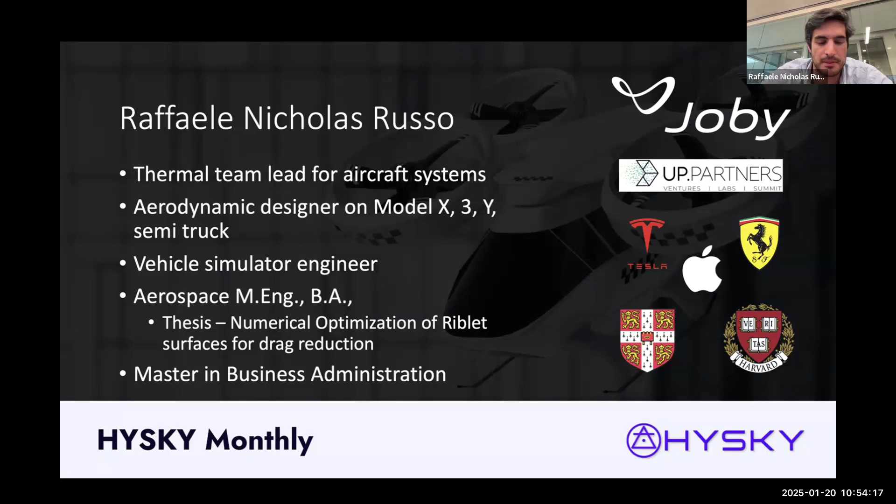The other thing that's valuable of this slide is the fact that I spent a while in electric. So it's not like I showed up in the workforce as a firm believer of hydrogen from the beginning, thinking electric sucks, this is the only answer. Rather I spent significant time at Ferrari, the Ferrari F1 cars, on the team I was in - believe it or not, they're hybrid, they have a battery and they use that for boost. So from Ferrari F1 to Tesla, and then Joby. Initially, Joby was electric only, right? Joby is still electric only, but the team was focused exclusively on the electric product. So I've had plenty of time to appreciate the huge value that electric cars, electric aircraft bring and will bring to society. And that's, I think, a better platform than coming in blind to electric and going straight to believing aviation must be hydrogen only.

Okay, enough about me. Why hydrogen? Of course, you've seen, this is HYSKY. Many of you come from the space of either hydrogen or aviation. I'm sure you've seen a slide titled Why Hydrogen a million times. I will try and make this specific and tailored to what Joby believes, what I believe, what someone who's done the work believes. So in some sense, I don't just say this, I actually see it, having done a bunch of research and development in the space. But it really started in the public eye only last year.

Now, why hydrogen means a bunch of things. Let's start with the biggest one, which is, of course, its fuel efficiency, its weight efficiency. You've seen forms of these slides in the past. I think what's valuable about this is comparing and combining the value of hydrogen compared to battery and compared to jet fuel, not just on the specific energy basis, but also the efficiency basis.

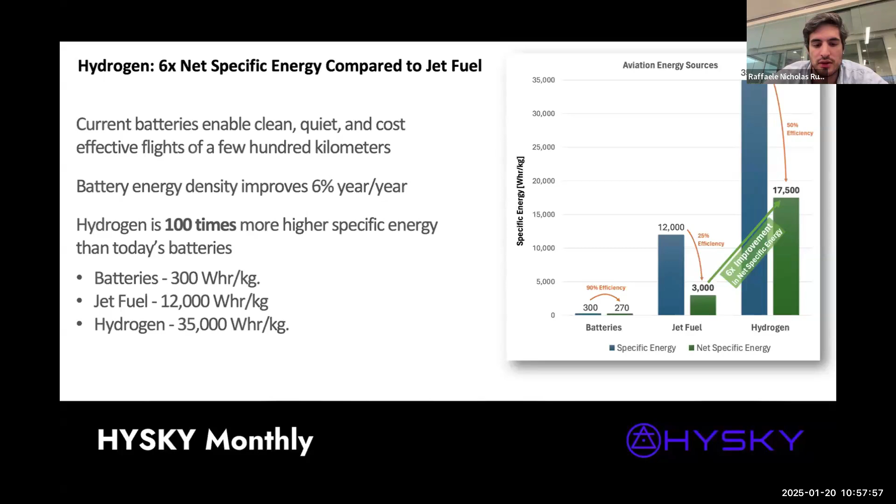To put this in numbers that are more palatable, more directly applicable to something you may be more familiar with that isn't Joby, here's a comparison of the A350 and the A320neo. Roughly, most of its configurations are twice the range and twice the payload of a 320 versus a 350.

The consequence of doubling the range and the payload from one aircraft to the other is actually a 4x increase in weight, roughly a 4x increase in upfront capital cost, and then that mission burns 6x more fuel. If you normalize that per passenger, which we like to work in per passenger per mile, that means it's still 2x heavier, 2x the capital cost, and 3x the fuel.

What's very valuable here is the fact that, as we said for batteries, you have a lot more batteries as you fly further. That's also a true statement for fuel. It's less appreciable, it's something we accept as the status quo today, but hydrogen looks to improve this further than what jet fuel can, basically getting to a point where the vast majority of the aircraft isn't carrying everything else, it's carrying people.

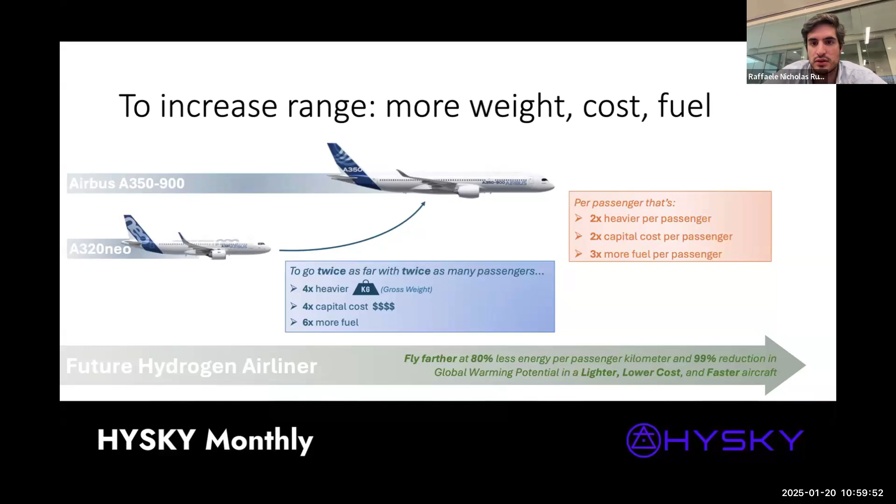At the bottom, we have a future hydrogen airliner, or a generic one. You can fly further, but only have 80%, or decrease 5x, or have 80% less energy per passenger per kilometer. The other tremendous part, which I'll get to in the next slide, is the fact that we believe the reduction in global warming potential is up to 99% compared to a typical jet fuel powered aircraft.

You've seen this slide a million times. I will say, Joby believes this, JoeBen believes this, this is front and center. What we're saying here is that many countries in the world have committed to net zero by 2050. Aviation today is only 2%.

You can argue a lot of things that today contribute a lot more. Wildfires are a much bigger proportion. Maritime transportation is a much bigger proportion. The electricity grid is a high proportion of all those. However, it's one of the hardest to abate sectors. So we don't have clean answers today on how to get that total number, meaning CO2 emissions in tons per year, not percentage, lower.

A lot of numbers, a lot of studies I've read through and researched, all suggested that 2% of aviation today is likely to increase to 10%. Partly because everything else is going to drop as they try and push to net zero, and partly because luckily larger shares of society are going to have access to travel, and therefore the actual total number of tons per year of CO2 is going to go up.

But if we can forecast pretty reliably that in 2050, while everything else is going to net zero, aviation is going to higher and higher percentage of the total, we appreciate we need to start moving now. That's part of the reason, alongside the efficiency argument I just made, as to why it's now—it's 2025, it's 25 years, it's not that far.

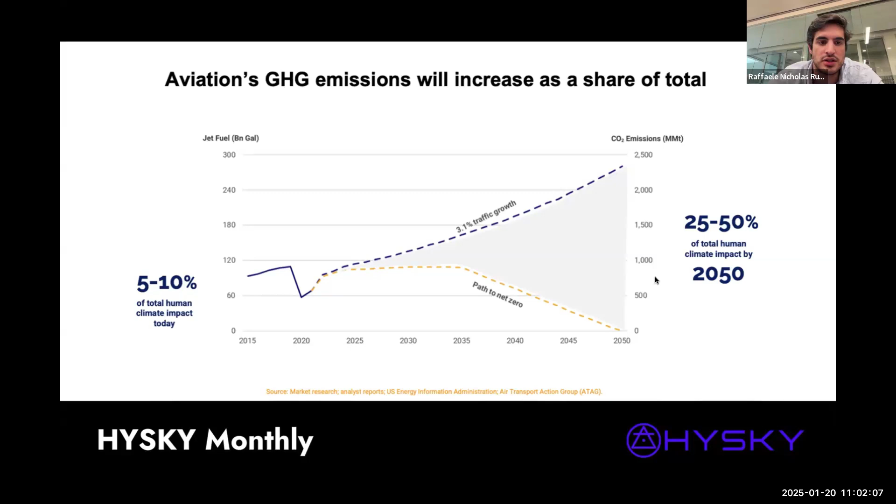An additional point on emissions is the contrails part. This is something that has a lot of research backing it, but there's also research against it. Luckily, a few companies and a few research centers are trying to answer this question in more detail.

Contrails are the clouds that form behind aircraft. Depending on conditions, altitude, and humidity, they have a tendency to either dissolve immediately or remain and form clouds that ultimately have the same effect as CO2. In the sustainability world, it's typical to talk about CO2 equivalent.

What that means is not just the CO2 you're putting out, but actually what's causing global warming. Contrails do not have CO2. They have NOx, soot, water vapor, particles of all sorts, but not CO2, and yet they contribute to CO2-like effects, which is why if you only account for CO2, you capture just a third of aviation's total climate impact.

All the studies converge differently - some show 30%, some show 70%, somewhere between 1.5x to 3x - but most of the research agrees that for the CO2 emissions you see, about double, so 2x, for a total of two-thirds, is what you don't see - what contrails are contributing just by forming.

I'll leave this here because it's not itself something that - how does it tie in? How does it change with hydrogen? What matters is that you need to solve not just the CO2 emissions themselves, you need to solve this contrails emission equally or more importantly.

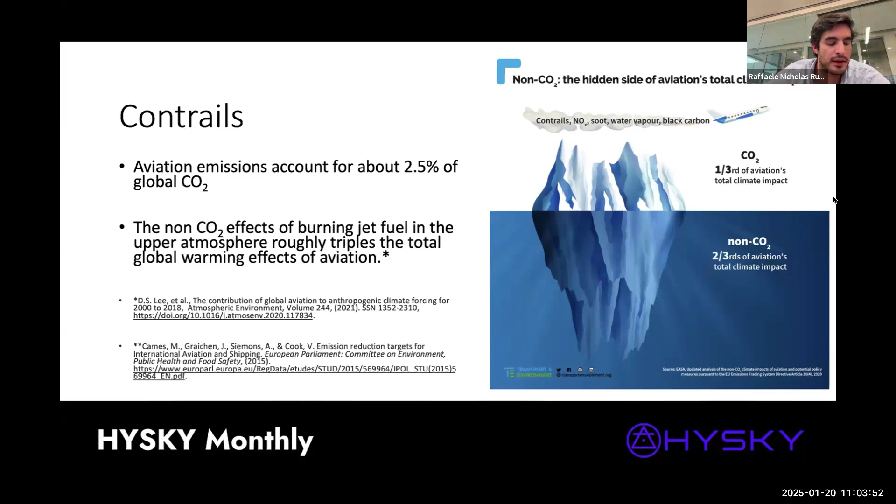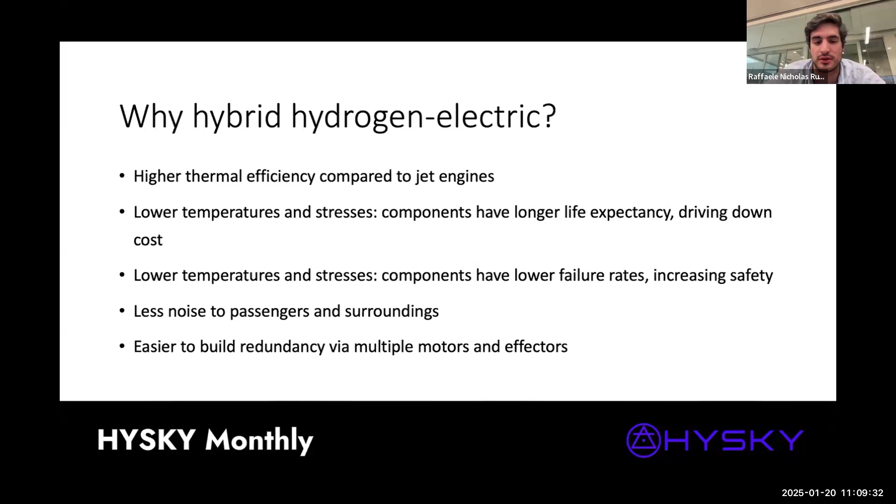There's also significant benefit, and I'll show you more in later slides about why this is true, but it's easier to build redundancy with multiple motors and effectors. Electric motors are easier to scale down in size compared to combustion, so it's not much more work to have six smaller props than one large prop, as long as you're flying electric. If instead you're flying with a combustion engine, you either have very complex axles and transmissions, or you leave a lot on the table in terms of weight, because you're creating six or multiple separate combustion motors and effectors.

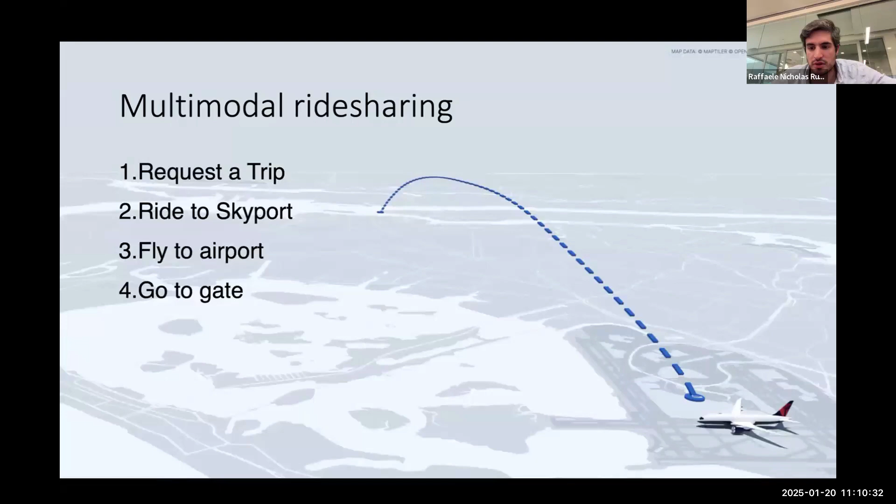First and foremost, what does Joby do? What is Joby going to launch as its first product? You're in Manhattan, you're trying to get to the airport, you call an Uber, and that Uber takes you to the closest vertiport. Here, an eVTOL, like the one shown, takes you to the airport and you're already at a gate. Now, this example is with an airport, and it's showing our partner Uber and our partner Delta. What really matters here is the fact that today, and I've done it many times, JFK to Manhattan is either an hour and a half by subway, or probably even more during rush hour, and $100+ in a taxi.

The multimodal element of this will come back later with hydrogen, but the key thing is Joby has already started, by acquiring Uber Elevate a few years ago, implementing multimodal ride sharing. All that means is we're looking at door to door travel. We're looking at how, from where you start to where you want to be, we're minimizing that time. So you need various different things: you need a car, you need a VTOL, you need a commercial aircraft. All those options are integrated into what will be our product launching in Dubai first, and in US markets right after. This is significantly different from the model today of aviation travel, or really most types of travel, where this multimodal element doesn't exist.

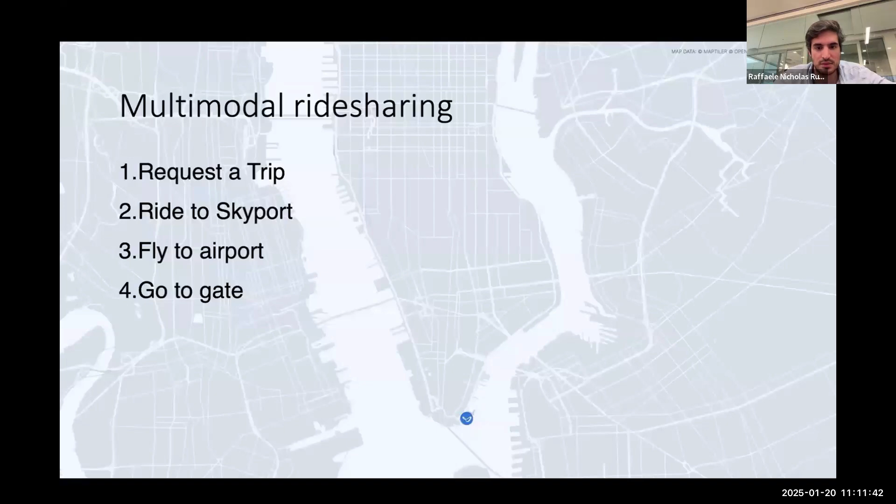Once you're in the air, the aircraft transitions to flying on the wing. Flying on the wing, compared to remaining in the mode most drones fly in, is why you can get to these longer ranges. Flying on the wing is significantly more efficient in terms of lift to drag, in terms of distance traveled per unit of energy, than flying purely as a prop. Other competitors are flying purely as a multi-rotor or quadcopter, different names for it, but if you remain in this vertical flight type of asset, you dramatically reduce your range. If you manage to transition to forward flight like Joby does, then you're getting into the hundreds of miles of range. You're not going to exceed this because, spoiler alert, electric is a lot less energy dense than it needs to be to go 500 plus miles.

But to get to the distances of large urban centers like New York, like LA, 100 miles is actually your perfect sweet spot. In terms of speed, ultimately the goal is to save hours and minutes of travel, so it is significantly faster than ground travel. Additionally, and this is an interesting number, the average ground trip is about 40% more circuitous, a longer route, than flying in a straight line, as the eagle flies, or whatever the expression is.

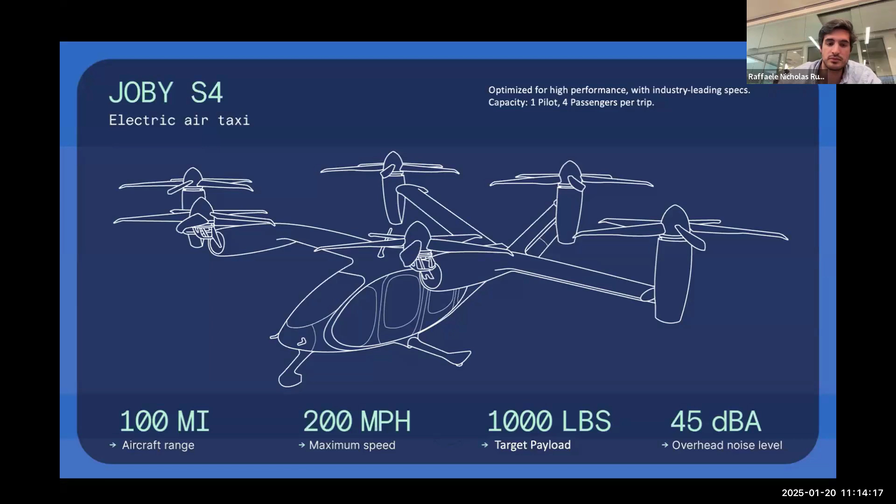It invited NASA on site to do a bunch of studies on the noise profile of a bunch of aircraft. We have our own Cirrus SR-22. We got a few other aircraft and helis on board, and then we got Joby. As I mentioned earlier, having forward flight and having multiple props actually decreases the noise by increasing efficiency, decreasing tip speed.

45 decibels is actually really, really quiet. You may find on YouTube various videos of JoeBen talking while the aircraft takes off behind him, and there's no weird sound production happening there, no targeted microphones. The aircraft is significantly quieter than anything with comparable capabilities can do today.

This element of safety, of sound, is something that Joby, well before I joined, identified as one of the most important elements for the successful outcome of this product, meaning people actually wanting them. If this is too loud - a good example is if you've ever been to Rio, or even South Manhattan, there's a lot of helicopters, a lot of noise. The average population, the vast majority of the population doesn't fly in helicopters, so it just comes as a nuisance.

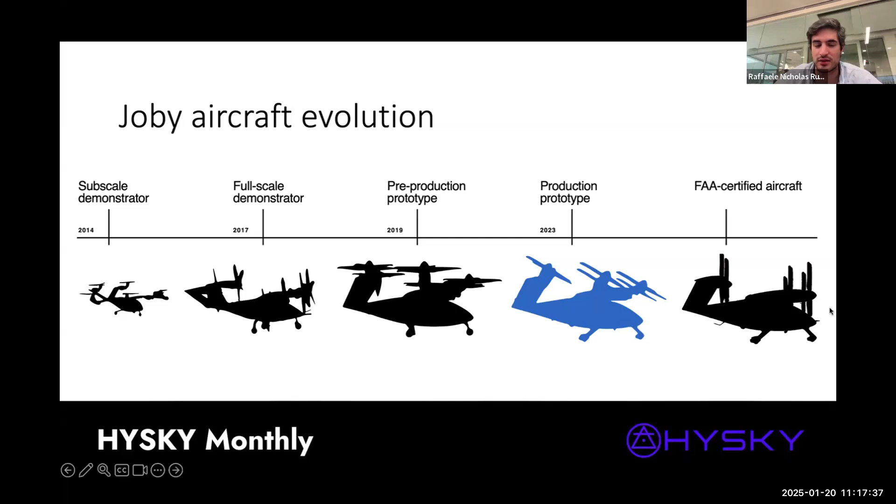It was actually a spin-off. It's founded in 2015, but H2Fly already existed in the form of a DLR project with the same people that eventually founded the company, well before 2015, and had already demonstrated gaseous hydrogen flights before Joby acquired it in 2021 - right around where I started working myself on hydrogen.

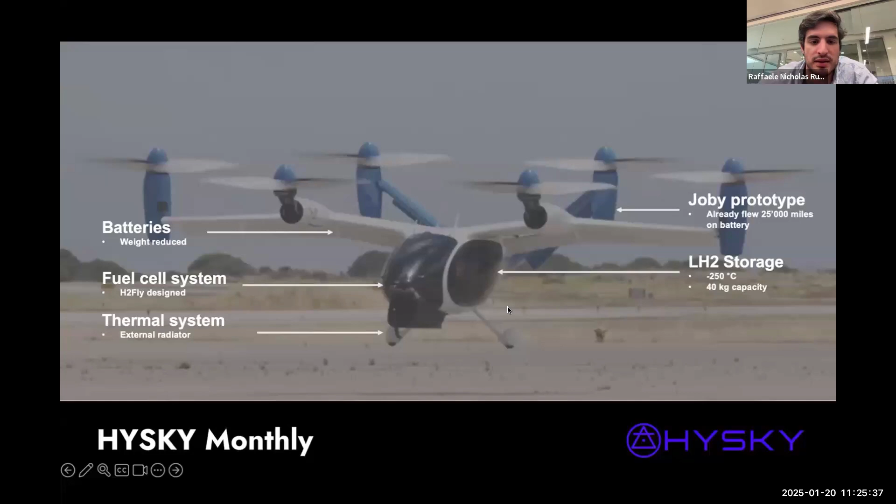As I mentioned, H2Fly was our close collaborator for the fuel cell. And the scoop under here is for external cooling. Batteries don't require that much cooling because they're 90% efficient, as mentioned earlier. Fuel cells have better efficiency than jet engines, at 50%, but that means for every kilowatt of electrical power you produce, you have about a kilowatt of heat to get rid of. So we designed and retrofit this carbon fiber scoop that contains a radiator, rejecting that heat using ram air.

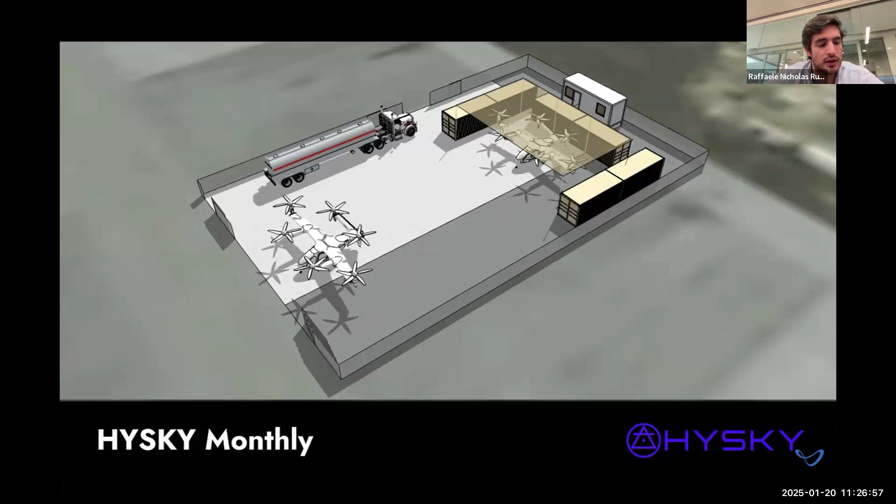We needed to design the aircraft, retrofit as much as possible, reuse as much of the existing electric resources as we could, get permitted and approved for this facility, and we were able to achieve a 5+ hour flight. This is a rendering, but the aircraft did fly in this actual pattern.

This is Marina, California, just north of Monterey — somewhere in the middle of California for those who don't know it. It's a beautiful place for Joby to be testing all of its aircraft, and specifically this one would run circles of a few mile radius for hours and hours. It got boring after a while for the pilots and the team just watching it spin circles, doing various flights at 500+ miles, the longest of which was 561 miles, for 5 hours plus.

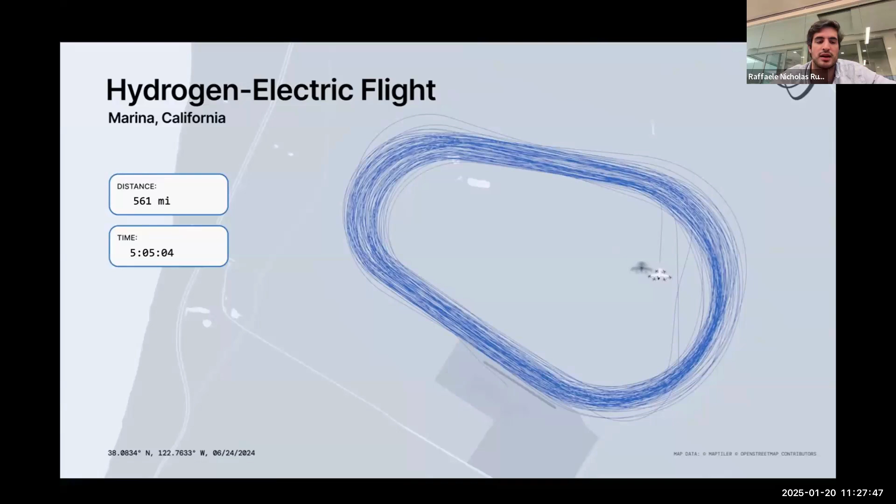The first thing is, as I've repeated many times at this point, fuel cells are the key enabler because they make the best part of hydrogen and electric. Not just because Joby's already got a great electric product, but because the physics are significantly better, and the environmental side of it is significantly more competitive. Fuel cell development for all applications — maritime, ground, energy storage, and aviation — is progressing really quickly. Every week I speak to new suppliers coming out with tremendously valuable products.

There's definitely an inflection point in fuel cell supply, whether it's H2FLY's own or external suppliers. There's a lot of development happening that will make fuel cell based aviation easier and easier.

Number two, for aviation, that's not necessarily the answer for other modes of transport, but for aviation, liquid hydrogen is key. It does come with a penalty, especially the penalty of boil off, the managing of it, the design, penalty in safety if not well managed, and additionally a penalty in the cost of liquefaction.

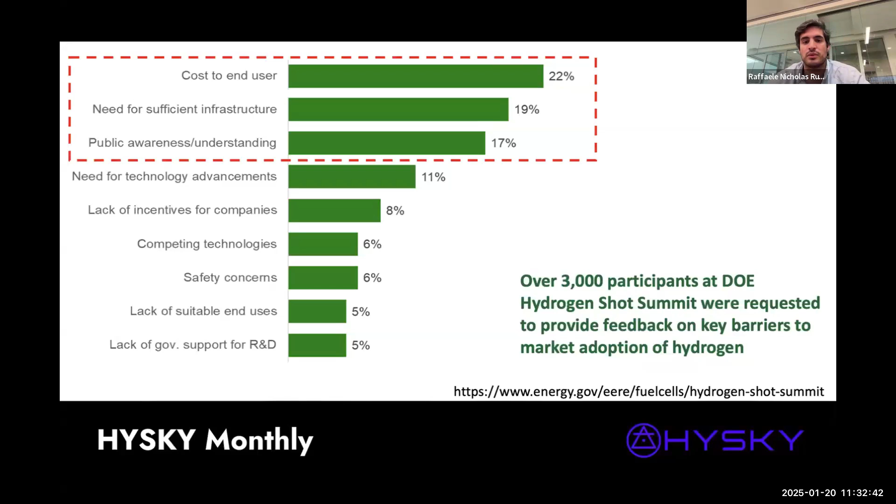Very lastly, what happens next? What's the goal of all of this? I mentioned New York, and I promise we're almost at the end. New York, as an example market—we build out as an electric aircraft company, an electric infrastructure. That means you're flying from JFK to your party in the Hamptons, or perhaps to Jersey or Connecticut. And from there, you've built a network of various vertiports where Joby takes off and lands.

Some are helipads, some are recharging stations, and you have the multimodal service working. Joby expands its service from New York and starts building other localized networks. What does that mean? You can also do the same thing in Boston, within Boston, and then in Washington.

Now, where does hydrogen come in? You're at this point in time where Joby's already built a bunch of vertiports, a bunch of infrastructure, a successful product on the electric. The Joby hydrogen system allows you to connect these. It aims to leverage as much as possible, and yes, this is the range.

It aims to leverage as much as possible of the existing infrastructure. It aims to work in tandem with the electric, in tandem with commercial aircraft. But really, what we're talking about here is connecting all of the East Coast, and similarly connecting much larger areas—Paris to London and more, all of Southern England, most of California together. The range that hydrogen enables is such that this is possible.

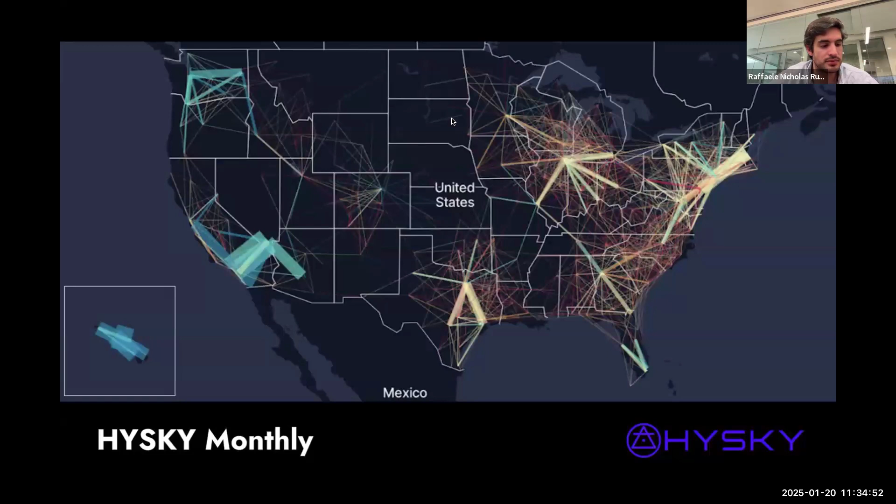The last slide I'll leave you with is Joby's mission is to save 1 billion people an hour a day. What does that mean with the electric product? Instead of sitting in traffic, you can take an electric aircraft to get to work, and your commute goes from an hour to 20 minutes.

What does that mean for hydrogen? It means that instead of taking your car or an Uber and waiting through the airport—fastest people I know still do it in 30 minutes—then flying your commercial aircraft, then landing, taxiing, and deboarding, and still being in JFK or LAX, which are far from downtown—this is a 3 hour and 40 minute trip. The Joby hydrogen aircraft may be cruising slightly slower, such that instead of an hour and 20 for the actual trip, it's an hour and 40.

But you can take off from downtown LA. You can land in downtown SF or downtown Manhattan, or wherever it may be. So in that regard, you are saving a tremendous amount of time.

And these are numbers I've spent time corroborating—how long the average trip to an airport is, how long the average time through an airport is, even for business travelers. And then, realistically, on the other side, how much of a granular spread can we provide these vertiports for an electric or hydrogen aircraft. This distance and difference in time on a trip like SFO to LAX—this is where the value is. This is where the customer can really benefit from this whole thing. This is why we're doing it.